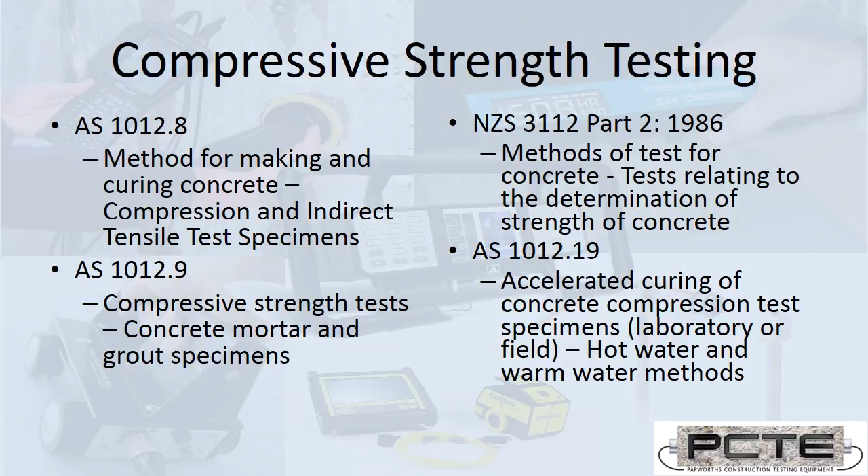So, back to our comparison of techniques. Early age cylinder strengths are from a conventionally cured cylinder, broken early rather than at the full 28 days. There's not much additional setup requirement; the cylinder is simply cast in addition to the 28-day cylinders and broken early. It's the same kind of sample used for 28-day strength, so it's going to be useful, but if the element is curing more quickly due to increased heat of hydration, we may not capture that additional strength gain.

Now, if we take cylinders and try to cast them in the same place, we may be capturing the real temperature of the curing environment, hot or cold. This could improve our relationship if done correctly, but if we've made a poor attempt to co-locate, it may not correctly capture what's happening. Again, very low setup requirements.

Finally, match temperature curing is an attempt to capture the real internal temperature of the concrete and create a curing environment artificially to match that, so when the cylinders are placed into that environment, they have the same temperature as the internal concrete.

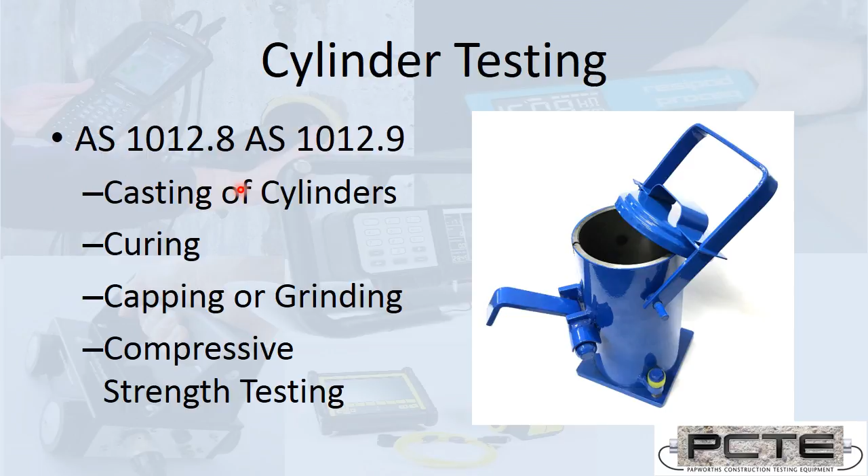So 1012.8 and 1012.9 cover casting, curing, preparing and breaking cylinders. When cast, it's commonly a 100 or 150 millimeter diameter cylindrical sample with a 1:2 ratio. These samples must be compacted appropriately - they may be rodded, an external vibrating table may be used, or an internal vibrator may be used to compact the concrete.

A corner case here is that self-compacting concrete is just placed into the mould, allowed to compact, and air bubbles knocked out. The key thing is that external vibration can be used for any slump flow properties, but when it's appropriate to use rodding or internal vibration is partially controlled by the slump index or other factors affecting compactability.

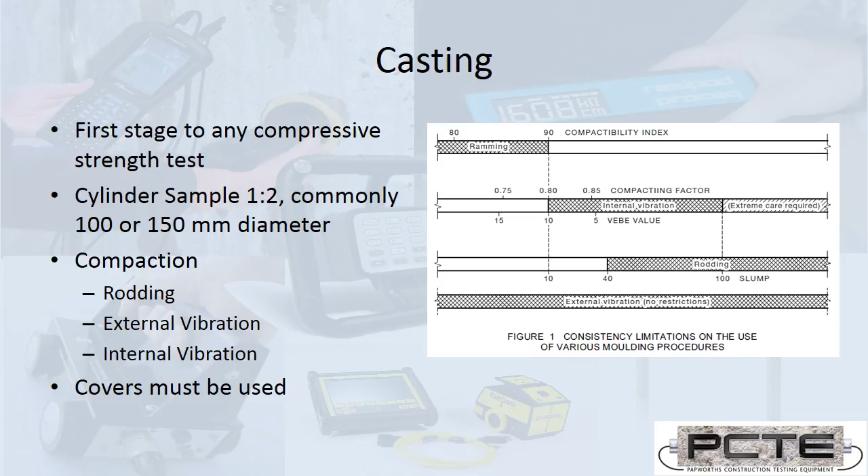So when choosing how to prepare the cylinder on site, an appropriate method of compaction must be used. If we don't compact the cylinder correctly, it's not going to correctly represent our strength no matter how we cure it or break it. Finally, the Australian standard defines that those cylinders need to be covered to prevent loss of moisture.

The curing environments in Australia are defined by where in the country we are. In the temperate zone, it's a 23 degree centigrade curing environment, and in tropical areas, it's a 27 degree standard curing environment.

The other thing defined here is that there's an initial curing period, minimum 18 hours, no more than 36 hours, where the cylinder is cured inside its mould, covered to protect from moisture loss, but not in a moist or immersed environment. Once that period is complete, the cylinder needs to be transferred as quickly as practicable into a moist curing environment.

A quick note here is that the Queensland Transport and Main Roads test methods require wet storage of the samples immediately, or where it's a steam cured concrete element, the cylinders are placed in the steam curing environment. This is seen in a couple of different places.

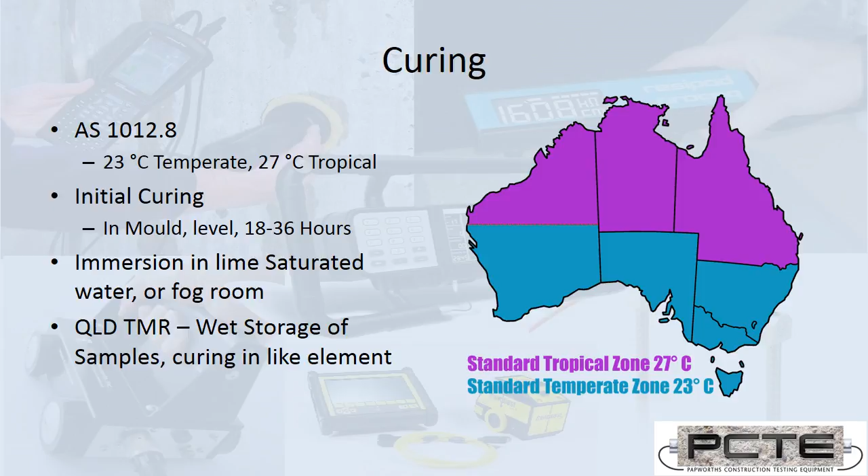Now, as I said, I'm going to quickly explain accelerated curing. The standard defines that when cylinders are going to be placed into a very hot environment, the cylinders now need to be heated with a bit of a ramp up. They can't be taken straight from casting and placed in 80 degree heat water - they need to be raised gradually.

So if you expect the internal temperature of the concrete to get to a certain point and you're using a match temperature curing system, it's important the cylinders make it into that curing tank before the heat increases. They need to gain heat as the concrete element gains heat, not be shocked by placing in. Also, for warm or hot conditions, there needs to be some amount of time outside to cool before demoulding.

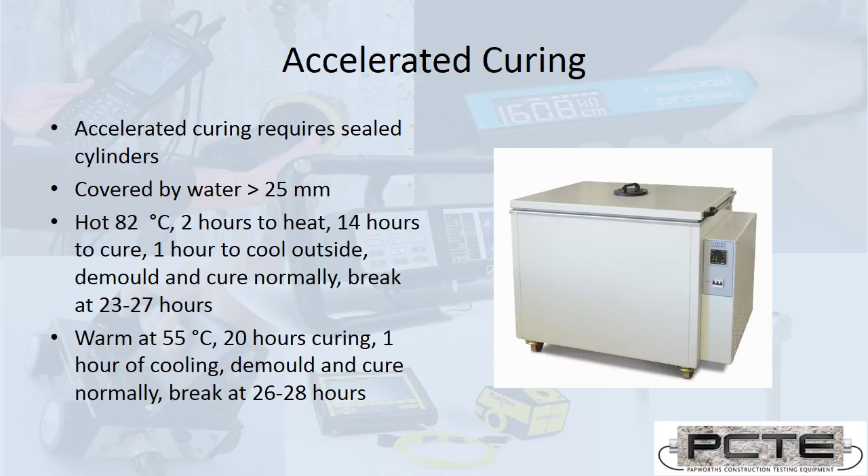The other requirement here is that these are sealed cylinders, not just covered - they need to keep the water out to prevent that influencing the concrete inside the mould. So if you're using a match temperature curing system, you need to give some thought to how you protect the unset concrete from the water if placed in immediately, and if placed in after a normal setting time, whether that water is a suitable curing environment. Again, AS 1012.8 defines that it's a lime saturated water environment. These things need to be considered as part of preparing for the systems.

Now, finally, the samples need to be crushed.

As part of that, the top surface, which was levelled but not left entirely smooth, needs to be allowed to be flat, plane and square. So commonly sulfur capping or grinding will be used. Grinding's proved to be an easier system for this, grinding plane to 0.05 of a millimetre, and the crushers may better represent the strength depending upon how those samples have come together.

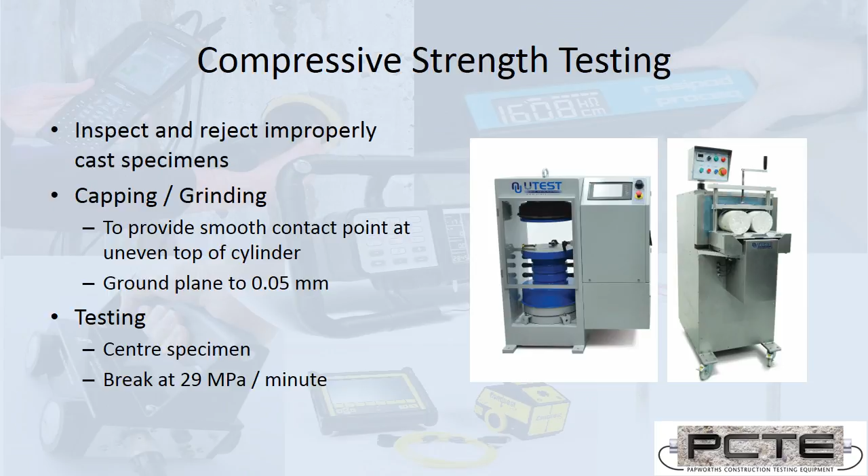Standard also defines the rate. So what's different with match temperature curing?

Match temperature curing is where we take the cylinder sample and place it inside something which is going to gain and lose temperature at the same rate as the real concrete element. In something like a steam curing environment, it's assumed that by placing the cylinders directly into the steam curing environment, they're going to cure the same way the concrete being cast in that environment does. If it's a water bath on the same line as the heated water travels in or out, placing cylinders into that water bath allows the water to match the temperature the environment's curing at, but it doesn't capture the internal temperature.

Another technique I have seen used is where cores are taken from the element after it's gone through initial curing, or where plastic cylinder molds are placed inside that element and can then be popped out to give a ready-to-go cylinder heated by the concrete around it.

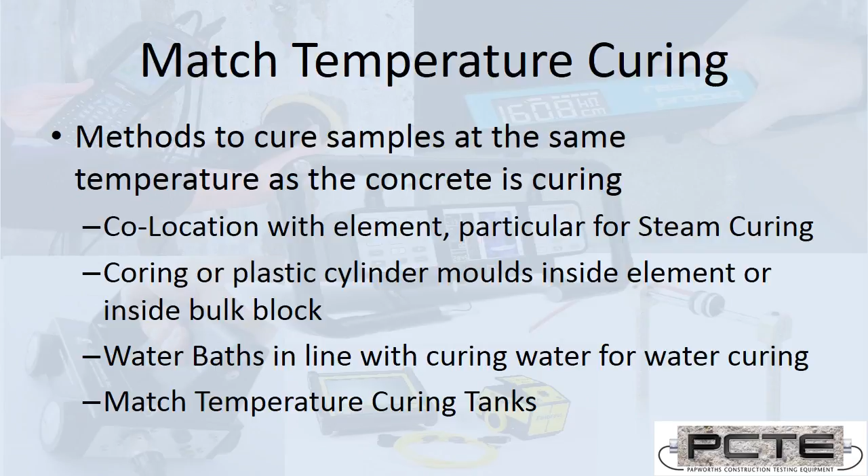Match temperature curing tanks instead try to capture the concrete's heat in an external environment. A temperature sensor is placed in the concrete, and whenever we're using a temperature sensor as a tool to assist us with early age strength, the placement of that temperature sensor is important.

If there's a critical area where stresses are going to be greatest in the structure, it's important that the sensor be placed to capture the strength gain of that area. Similarly, if you place a sensor internally in a bulk element, there's going to be more heat internally than on the outside surfaces. So choice of sensor comes down to the engineer, who understands roughly what the heat gain is going to be in that structure, and places the sensors to capture the information they need.

You'll see this again when we come to maturity. So the match temperature curing tanks capture this temperature, and they have a refrigeration plant to cool the concrete and a heating element to heat the concrete, and they're going to track along with that sensor.

As I mentioned when we were discussing curing earlier, that's still a cylinder sample being cured, so it needs to be protected from the water, and the water needs to be correctly set up to make proper use of a match temperature curing tank. You don't want to artificially reduce the strength of a cylinder sample because it wasn't cured properly out on site rather than back in the lab.

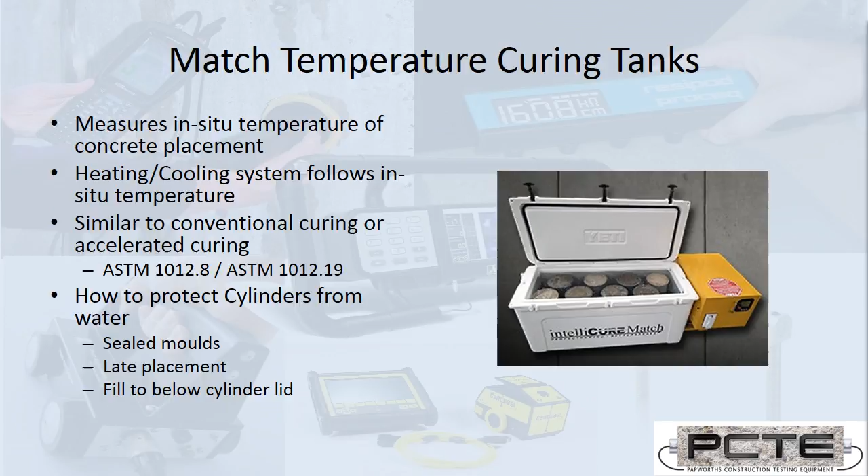So moving on to the in situ tests, I'll come back to the summary of techniques. We see we've gone away from direct strength testing. The in situ tests typically rely upon relating an external factor to the compressive strength of the concrete.

I'm going to discuss penetrometer testing, Schmidt hammer testing, and maturity measurements. Penetrometer testing and Schmidt hammer testing relate a rebound or the penetration force required to place a needle into the concrete, so they don't directly capture the strength on the internal areas of the concrete. They're instead a measurement from the surface, which may be fine. It may be that we want to know the lower strength, so a surface measurement is very appropriate.

Whereas with maturity measurement, we can again take a temperature sensor and place it internal to the concrete, so we're capturing strength at a point. Now the relationships are going to depend upon how well we take sample compressive strength tests and relate them back to our real concrete used on site.

The first point is, whenever we're doing a correlated method, you need to establish that relationship between a certain concrete mix and a certain technique of strength measurement. This means that for building custom curves, particularly Schmidt hammer testing and maturity testing, there needs to be quite a large test mix done to build the curve that is then used on site.

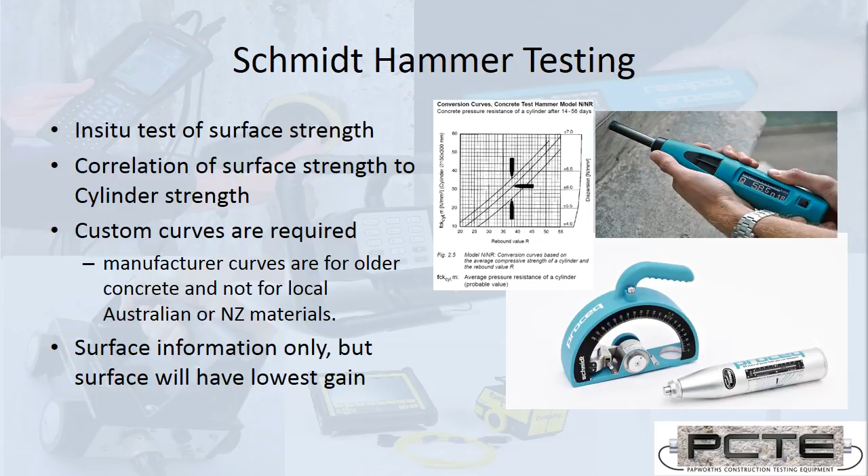So when we build a curve for a Schmidt hammer, the first step is to collect enough samples of differing strengths. If we cure 30 samples and break them all at 28 days, there may not be enough strength range. It's important that the breaks happen during the early low strength stages for an early age strength curve, and that we have enough cores or cylinders to produce a full curve.

Cores are not commonly used, but if they are, it's important to test the region that the core is being taken from before it's removed, and then use that to relate to the strength of the break.

With cylinders, they do need to be held securely. If the sample slips or moves under the strike of the hammer, it's going to report a lower rebound value. So in a cradle, or commonly, a little bit of pressure can be applied in the machine to hold it firmly, the sample test taken, and then the compressive strength test completed.

Finally, the relationships from a Schmidt hammer do have an inherent uncertainty. When we're striking the surface, there may be a surface inconsistency, or there may be some local variation in strengths over that surface area being tested. So we do want some form of safety factor.

One useful way to do that is to use a lowest 10th percentile curve. The principle is, if you look at my curve on the right, we have a line which represents the midpoint of those test results. If instead we map out a line that places most of our test results above the curve, we're going to have a more conservative strength relationship when we use that curve. Finally, once you've got this graph, we can read up from rebound results to get compressive strength results.

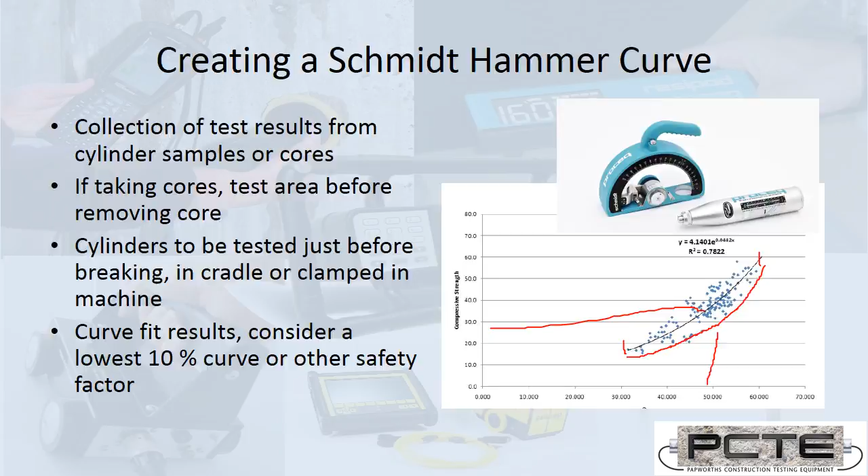Moving on to the pocket penetrometers or the shotcrete penetrometers, the penetrometer principle is essentially a needle with known dimensions pressed into the partially cured material. If the material has achieved a final set, the needle cannot penetrate into it, so this is very much only an early age strength measurement. The dimensions of these needles control how much force is required to press in, and by relating that force back to a compressive strength value, we have our measurement.

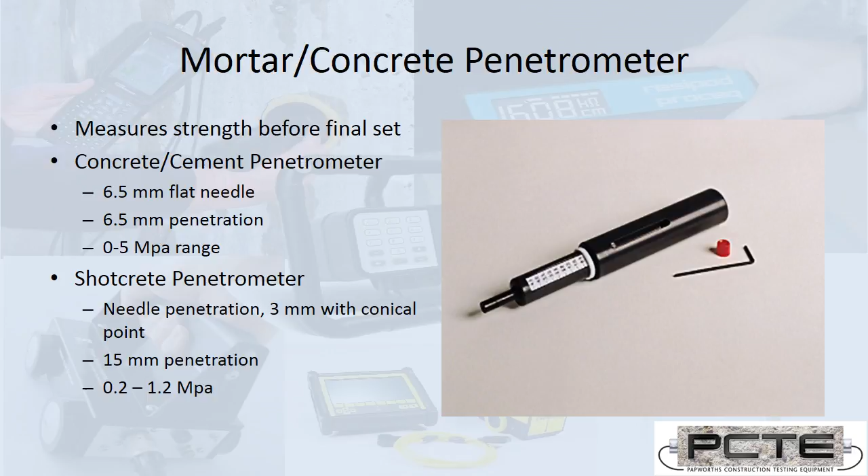In particular, the cement penetrometers may be used for grout testing, or to get an idea of when that grout's getting an initial set. But we haven't built a curve. The scale for the penetrometers is written on the side there, 0 to 5 MPa. So we're not going to have the same quality of relationship when it's a built-in curve based upon rough material properties than when we take the time to build our own curve. You can see the dimensions for two commonly used penetrometers in the text.

Now, concrete maturities need a little bit more explanation. With concrete maturity, what we're trying to do is take a temperature sensor, which is going to be placed out on site in the real concrete at a point of strength gain. Based upon that, we're going to relate the time that concrete has been curing at a certain temperature back to a gained strength.

The first thing to do is look at which maturity index we use. There's a Nurse-Saul relationship or an Arrhenius relationship. I'll explain them in the final section of this webinar, where I go deep into the ASTM standard. But in summary, one of them establishes a time-temperature history.

So this concrete element has existed at 30 degrees for 5 hours, then 35 degrees for 6 hours, and these come into units of time and temperature, time multiplied by temperature. This value increases as the concrete remains and gains strength, and when it reaches a certain value, based upon our established curve, we know what strength has been gained.

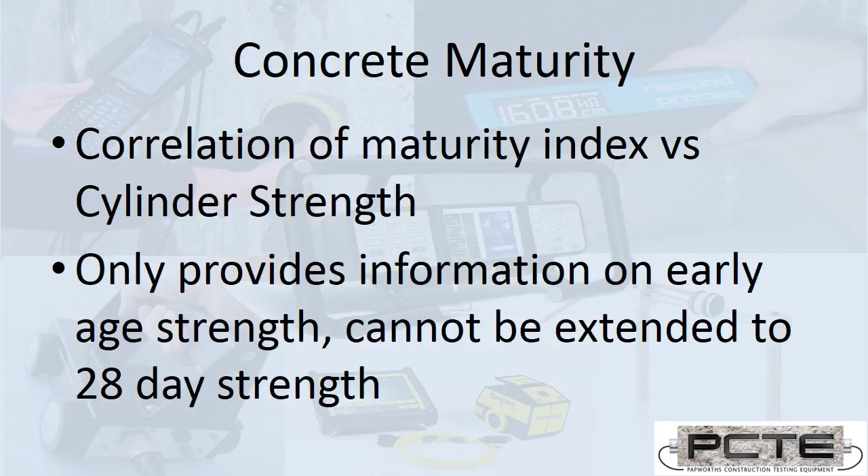The key relevant standard, the most commonly used one, is ASTM C1074. This standard has actually been approved for some users by NATA, so it's possible to work with someone who's approved in the use of maturity to the ASTM standard. There's also an upcoming proposed recommended practice within the CIA conference, so these are going to be interesting things to review in the coming months.

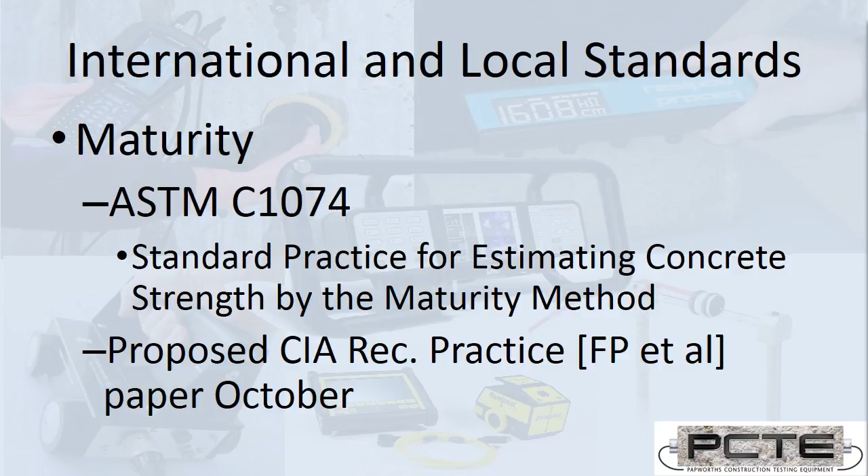When we want to build a strength relationship, it's a large-scale batch test mix. We build maturity relationships for each type of concrete to be used. We cast a large number of cylinders, at least 15, and embed our maturity sensors, which are logging the time history of the concrete, and they may be calculating one of the maturity indexes as well.

We then break these cylinders at intervals. If we don't have a particular schedule, the standard recommends 1, 3, 7, 14 and 28 days, but the choice of when the samples are broken depends upon when it's important that the strength be gained. So if we're concerned with really early strengths, the first 5, 10, 15 MPa of strength gain, there needs to be lots of breaks early on.

Whereas if we're concerned with mid-age strength, then 1, 3, 7, 14, 28 may be more suitable. One of the critical things is these samples are cured as per a normal concrete sample. Maturity is a way to create a relationship based upon conventional curing environments - that's 28, 23 degrees in lime water with 18 hours air curing first.

Critically, the instrumented samples must be cured the same way the concrete samples are. If they get colder or hotter than the samples that are going to be broken, they will no longer represent the maturity of those samples. So it's important that every mold be moved together at the same time, as soon as possible.

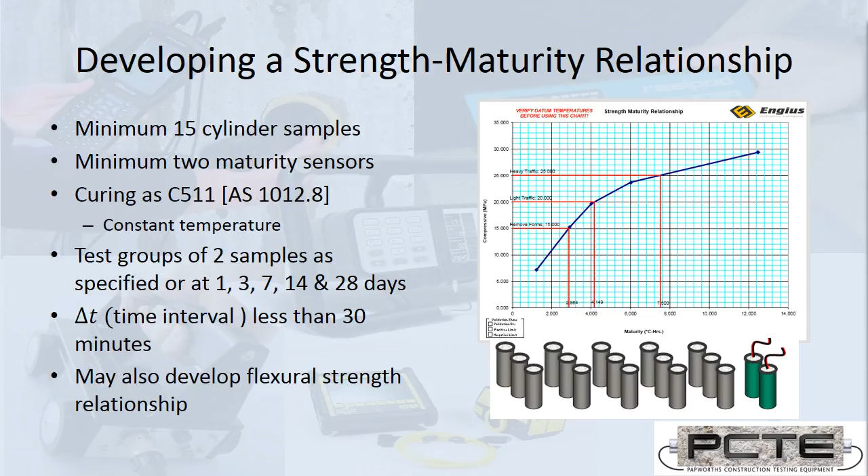Once we've got our curve built, we need to take measurements out on site. The sensors need to be cast into the concrete or placed into the concrete immediately after the concrete is poured. They need to be away from things that might take heat away from them. So if you have a large amount of steel reinforcing, the sensor needs to be a little proud of that, so it's not allowed to cool or heat more quickly by the change in heat of that steel.

And when there's a parameter that needs to go into the sensors, there's a datum or activation energy parameter used by each of the maturity indexes, and the sensor, internally, it needs to be entered correctly at the beginning. Otherwise the data will need to be adjusted afterwards.

Now, the final thing about maturity on site is we need to monitor what it's doing. It may be that conventional early age breaks are compared to results from on-site, or it may be that when the early age cylinders are cast and are being used as backup or as another QA tool, that a maturity sensor is embedded into an additional cylinder which will travel with those site cylinders, and so when they're broken, there will then be a maturity check at that point.

Because if materials shift or the mix shifts over the life of the project, you don't want your curve to be out of date. The curve may need to be reworked if the materials change on site.

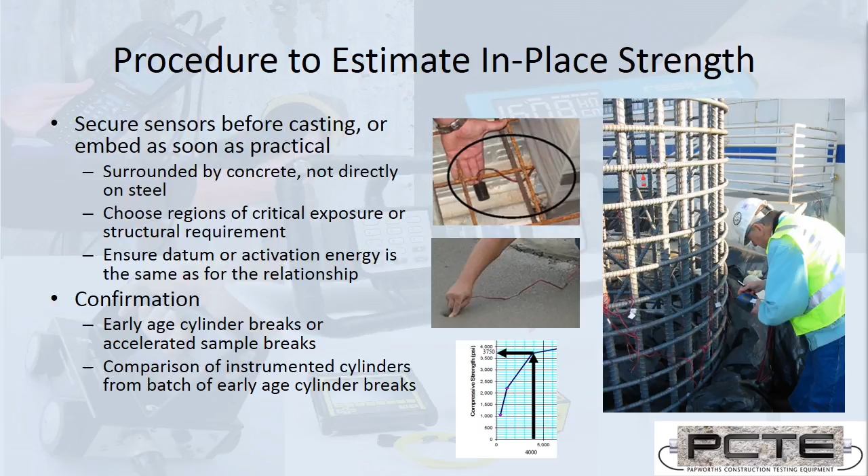So that completes the quick overview of the different test techniques. I'm going to go a little bit more into the ASTM standard for maturity, looking at the formulas used inside it. So the ASTM standard defines specifically the two maturity functions, that's the equations used.

It defines, as I just showed you, the procedure to make a maturity relationship. It also defines the sort of instruments that can be placed out on site and the procedures on how to confirm the strength relationship is still useful when it was developed, say, a few months ago, and we've been delivering concrete to site, and is that maturity curve still valid?

Now, it also mentions specifically limitations of the technique, and these are quite important. The technique assumes that concrete is continuously hydrating. If there is something that prevents the hydration of the concrete, very low temperatures, or lack of moisture, improper curing, a temperature measurement for maturity may not capture the real strength of the concrete, because if we've lost moisture and the concrete cannot gain hardness due to the loss of moisture, that relationship is now of concern.

As it also does not take into account the effects of those early age strength gains on the final strength of the concrete. One reason why a 28-day cylinder should still be used.

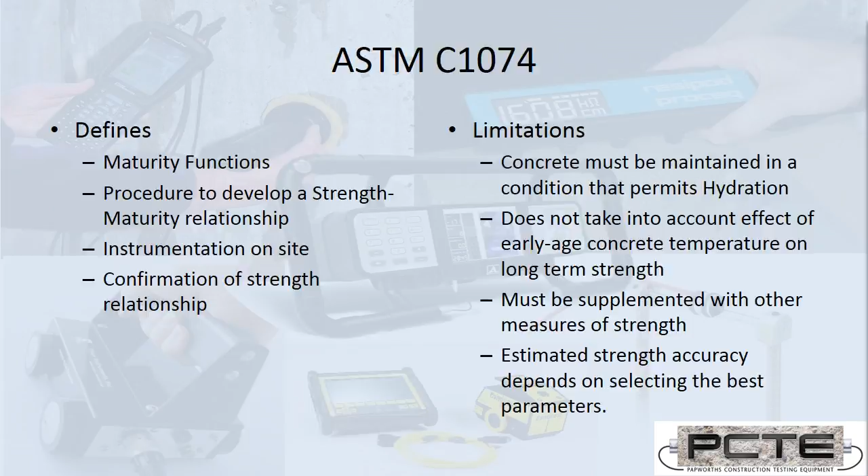So, the first method of calculating maturity is the temperature time factor. The temperature time factor assumes the strength development is a linear function of temperature. So if we increase the temperature, we get a corresponding increase in the speed of strength gain.

The datum temperature attempts to capture when hydration would stop for that particular mix. And the calculation is that for each point, the temperature time factor relies upon the average concrete temperature during that time interval, minus the datum temperature, multiplied by the time at that temperature. So fairly straightforward calculation.

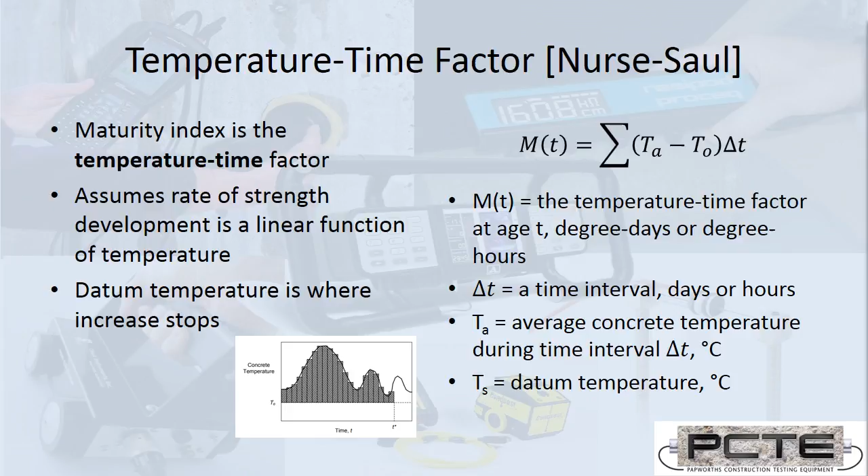The equivalent age is the other maturity index used, and this assumes that the strength development obeys the Arrhenius equation. Now, what does that mean? The Arrhenius equation is a formula for the temperature dependence of a reaction rate.

So if we place two chemicals and they're going to have an endothermic or exothermic reaction, and we place that into a water bath, and we maintain the temperature of that reaction at a cold temperature or a hot temperature, this equation is a means to model the rate of that chemical reaction occurring.

Critical to the Arrhenius equation is this idea of activation energy. There is a point where chemical reactions will no longer progress because there's not enough energy in the system. So this is captured by the Q factor in the equation.

Activation energy serves the same role as a datum temperature. It's a way to indicate in the equation when hydration would stop happening because there's not enough energy in the system.

The other key point of this calculation is that a specified temperature is recorded, as well as the average temperature. This specified temperature is what the equivalent age relates to, an amount of time spent at 20 degrees or 23 degrees.

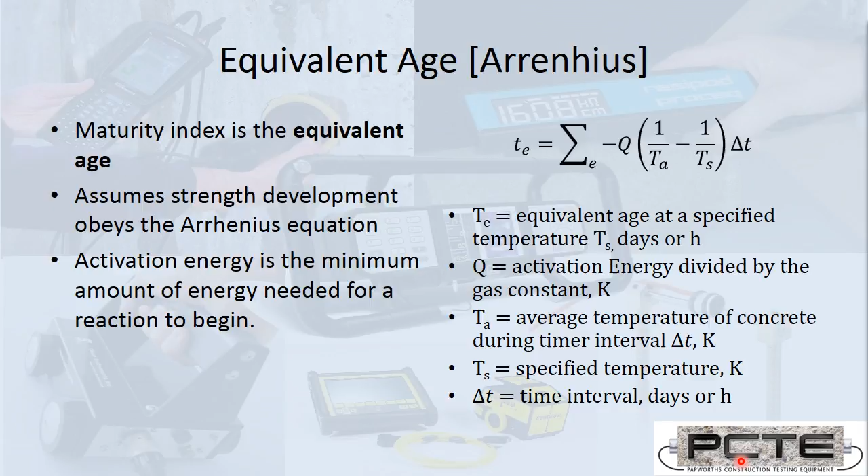So that's the particular details of the functions described in the ASTM standard. I'm now just going to call out a few quick details on some Australian standards that do attempt to better capture early age strength.

With the curing of test cylinders by Specification 820, which is a Main Roads WA specification, it has indication of co-location in a steam curing environment, and that they are then transported out to the lab.

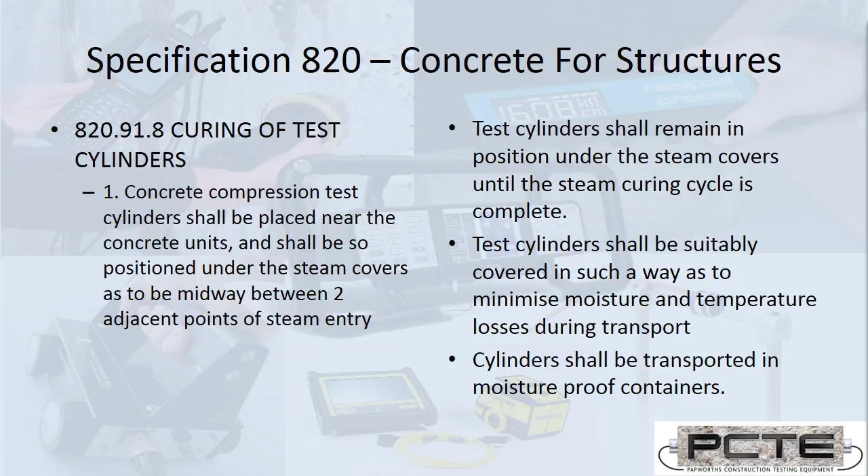For the Roads and Maritime Services R82 lean mix concrete, this is a standard used for a cement road base, where they do not want to use cylinder strengths for testing. They don't want to cast a sample and break it, though they may use cylinder samples during trial mix testing.

Instead, they are specifying that cores be taken from this road base and placed out. It defines that two cores should be taken and broken, and then they should have a fairly even strength. If there's a difference of 1 MPa between the break of both samples, a third one should be taken. It also indicates that a third should be taken if the strengths measured are less than 4.5 MPa.

And the coring samples are taken according to the procedure in AS1012.14, but they do make some modifications. So this is a requirement of your project. It's important to review the R82 requirements and the AS1012.14 requirements.

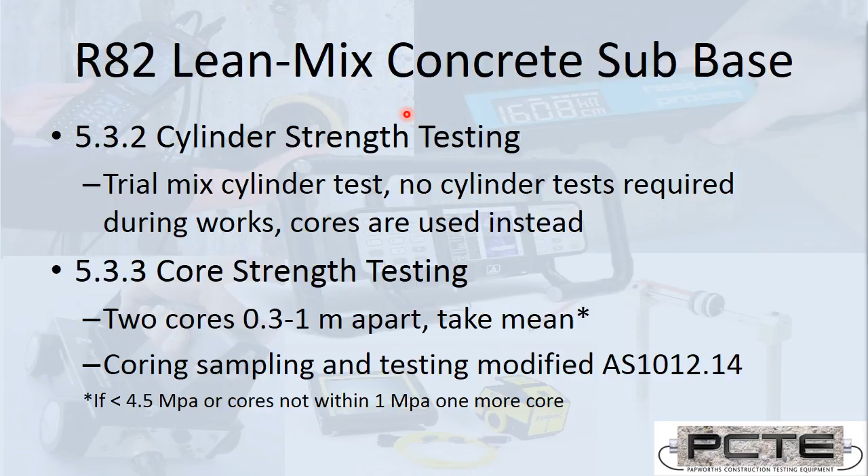Finally, VicRoads provides direct guidance on maturity, not so much on the techniques that are used, but on how to make your case for the use of maturity on a project. And this is useful guidance whenever presenting maturity as part of a project.

So it defines that various types of maturity testing may be used to determine early age in-situ strength development for formwork removal, precast unit lifting, or early stressing, and that they expect that the documentation provides a detailed explanation of what is being done, along with evidence of its previous use, including how accurate the relationships were on site.

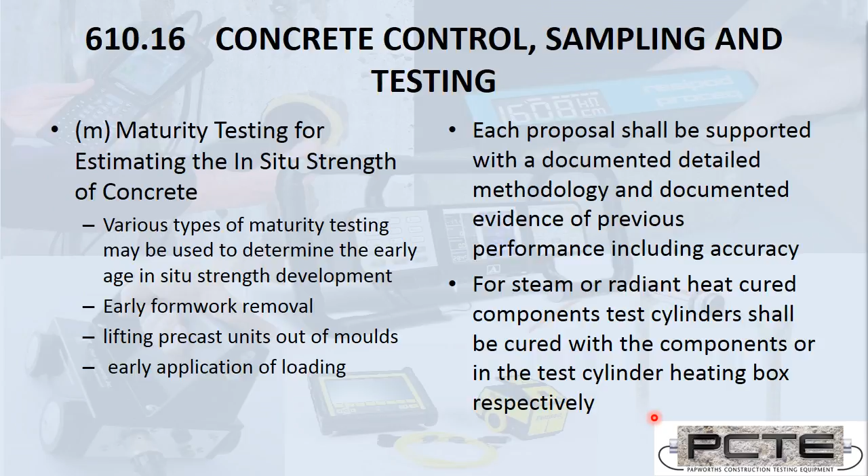So this is the evidence that's required to be presented. And similarly, VicRoads does specify that test cylinders be cured in a steam curing environment similarly.

So coming back to a quick summary of what we've discussed, I've discussed two particular early age strength measurements: the use of direct strength measurement by breaking cores, and the use of correlated methods such as Schmidt hammer testing or maturity measurement.

I've attempted to indicate that cores take a direct strength, but if you break a core, you can't break it again, whereas the correlated measurements offer the ability to check strength gain and then check again.

I've tried to explain why the strength relationships are of a good or poor quality, in particular that with the ability of care that can be taken to ensure a good relationship between strength gain and the correlated method. I've also tried to explain the equipment required.

For example, with co-location, all that's required is that the cylinders which are being cast anyway are placed in a suitable environment following the temperature. Whereas with something like a match temperature curing system, there is additional curing tanks required.

When it comes down to the correlated methods, there's less equipment required on site, but there is the requirement to use sensors or have instruments used for that measurement there. I've also tried to go through the specific setup requirements, where care must be taken to ensure the relationships being used are built for the concrete mix.

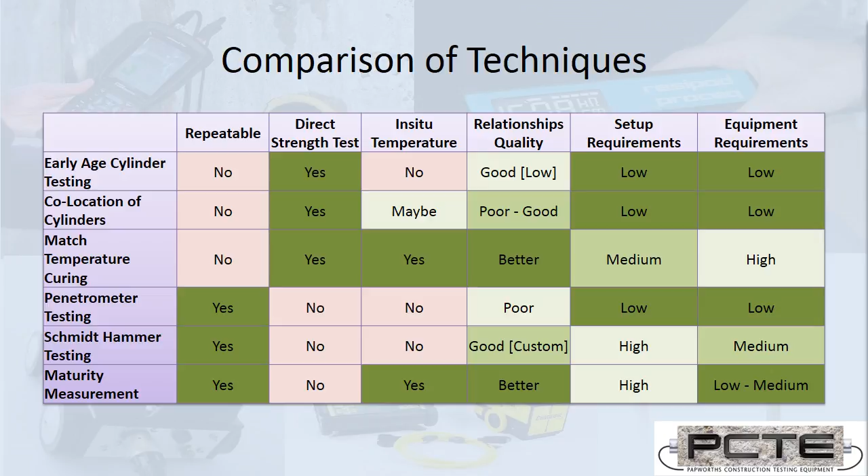So some of the key criteria when making the curve in the lab is that there's a minimum of 2 redundant temperature sensors, and you'd be very wise when measuring on site, if you wish to capture it, to use a very durable sensor or a suitably redundant sensor - a durable sensor where the cable or equipment is not going to break due to vibration and load, or if you're installing multiple temperature sensors, that's also a form of backing up and ensuring that information is there.

The other information in the lab is that you need to record every parameter. You need to know which mix was done and take the same care you would with any other testing situation.

The final question I had - let me just quickly look this one up - was about 2 and 3 day stripping, and steam curing is common. If we field cure at these conditions, we do not meet the standard requirements. Steam especially is a regular deviation from the method and endorsing reports.

Is lobbying Australian standards an option to change the field curing standard to reflect consumer needs? I don't sit on standard boards, but there is always the potential to get involved in the creation of better Australian standards and international standards. In particular, the question of 2 and 3 day stripping is common. And of course, with field curing, it may be possible to improve it, but if it's not in a standard, standards do not have the force of legislation - they are a recommended best practice, not a legislated required practice.